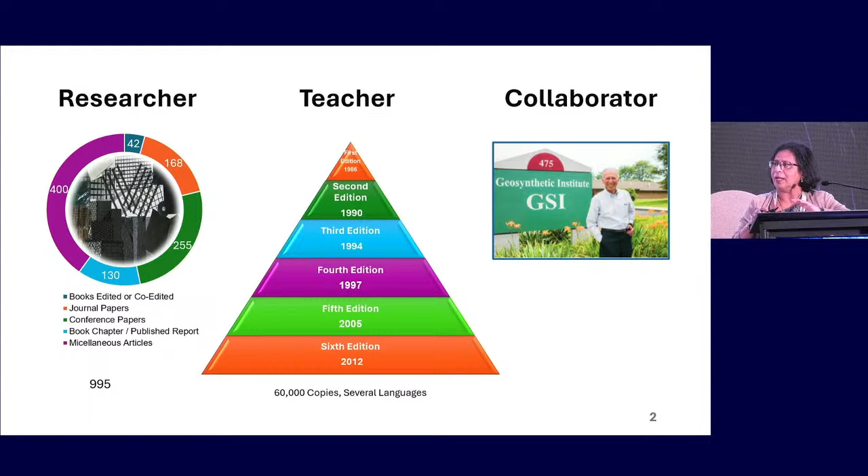So I'm going to use these three strengths, as a researcher and as a teacher, and talk to you about my journey as a faculty member at Syracuse University.

My research in geosynthetics started when I took a short course with Dr. Koerner in 1988, at one of the ASCE meetings. I just got tenure at that time, and I was looking for new areas of research. I just established an image processing lab, and I was working on soil filters. So I go to the short course. I had never heard about geosynthetics, and it was a half-a-day course.

One smart thing I did was bring a sample of geotextile with me, because he said that this can be used as a filter, and I was working on soil as a filter. I said that would be very interesting. And this is the starting of my journey and my students' journey in geosynthetics.

After that, in many conferences, I met with Dr. Koerner for a short time, but even in a few minutes, you know that he is really listening to you. And when he asks how you are doing, he meant it. And he would say that you come to GSI, use the equipment. He wrote a letter of support for one of my first NSF grants. So when he asked something, he truly cared, and I really appreciated that.

And in 2004, Dr. Koerner came to Syracuse University and gave a local ASCE lecture. He's there in the first picture with my student in my lab where I was doing work in soil filtration.

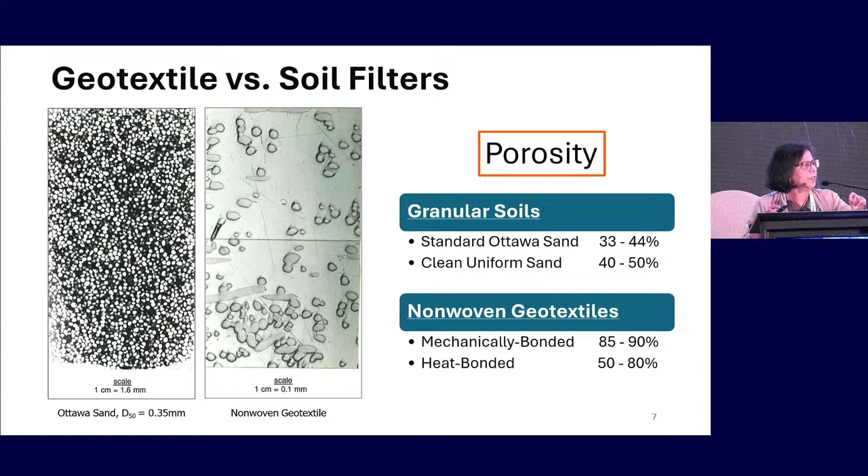So then you wonder, how would this thin, open textile work as a filter? We have done work in our lab, so we learned that geotextile alone doesn't work as a filter. It has to establish a filter zone and bridging zone. Once that is established, then it works effectively as a filter.

And geotextile filter design criteria are very similar to soil filter: permeability, retention, except clogging is more of a concern for geotextile filter, although soil filters do clog.

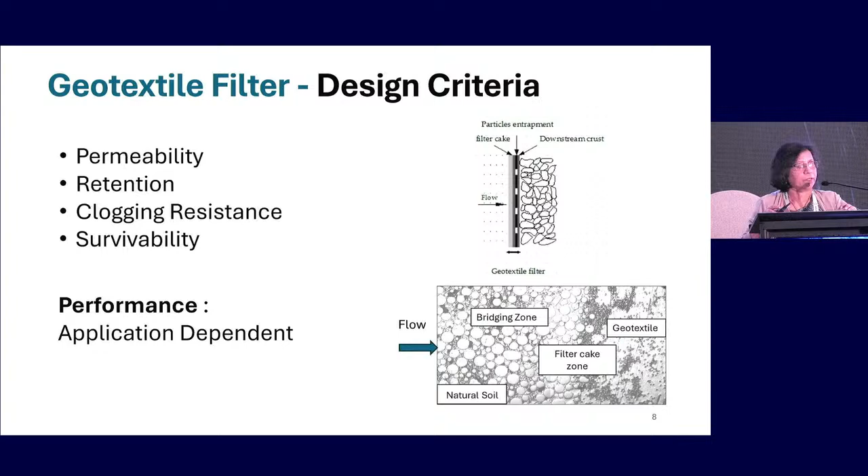Now, over 30 or 40 years, there may be 60 or 70 different retention criteria which have been proposed by lots of researchers, and they include flow of water, whether it's steady state or non-steady state. It includes soil properties, and most importantly, it includes pore size distribution or pore size of geotextile, which is different.

So now we have to really know how to measure pore size or pore size distribution of these geotextiles. So I'm going to take you for 10 or 15 minutes talking about pore size of geotextiles.

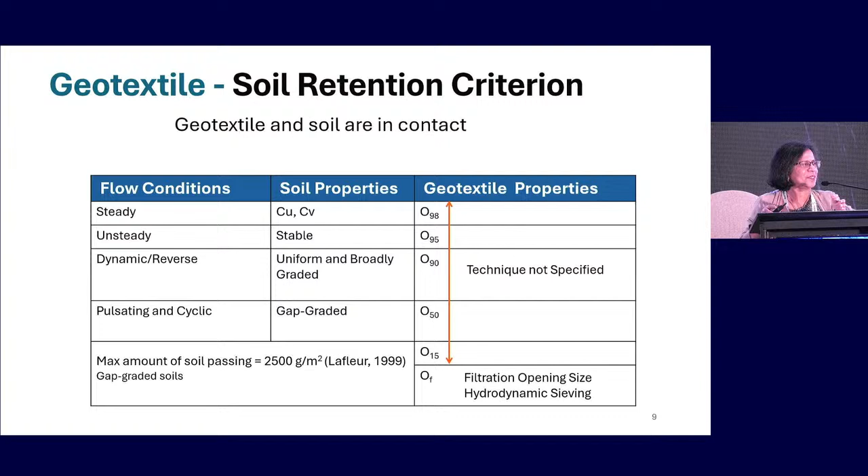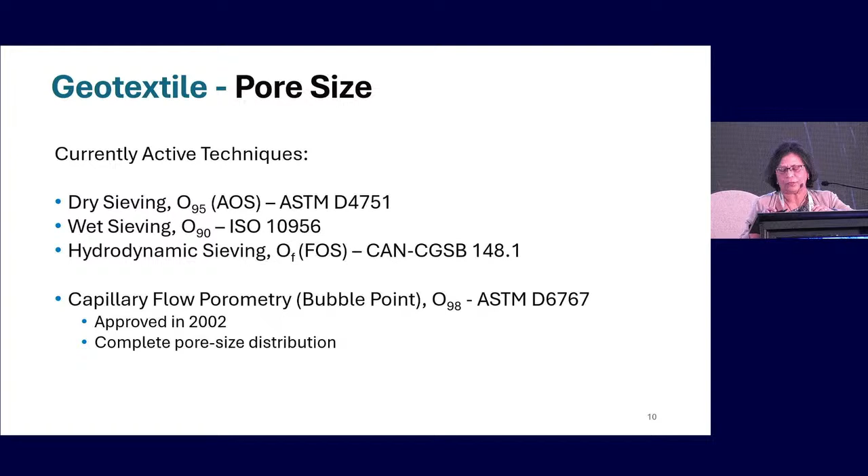There are many standards. The first three I list here: dry sieving, wet sieving, and hydrodynamic sieving. These are three standards used in the US, Canada, and Europe. They are sieving techniques. And a more recent technique is called capillary flow porometry, which can also measure the large pore opening of geotextile. Let me talk to you a little bit about these techniques.

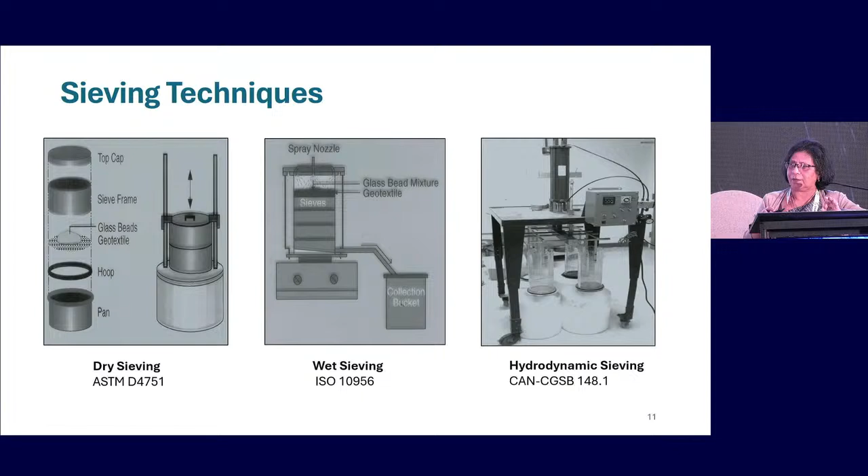These are three sieving techniques. None of them are perfect. Each of them has limitations and some advantages. But one thing I want you to remember is that each of them can give you a different pore opening size, okay? So they are not exactly the same, even if you do the test perfectly.

They specialize in measuring pore spaces of materials. So I took geotextile there. I went with my students, and they had this capillary flow porometer. I learned that most of the samples they are using have pore openings of 2 micron, 1 micron. For them, 5 micron was very, very large opening. So here I go with geotextile, which has 200 micron opening, and they said, why do you need to measure anything out of that?

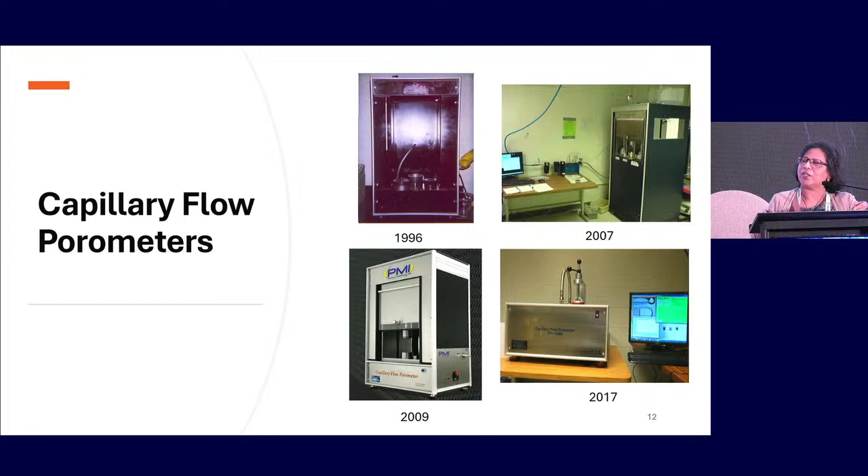So I learned a lot, and over the time, from 1996 to 2017, my students and I have gone to Cornell on numerous occasions, learned different devices, they changed different sensors, and we have used the generations of the capillary flow porometer device. This is a device, tabletop device.

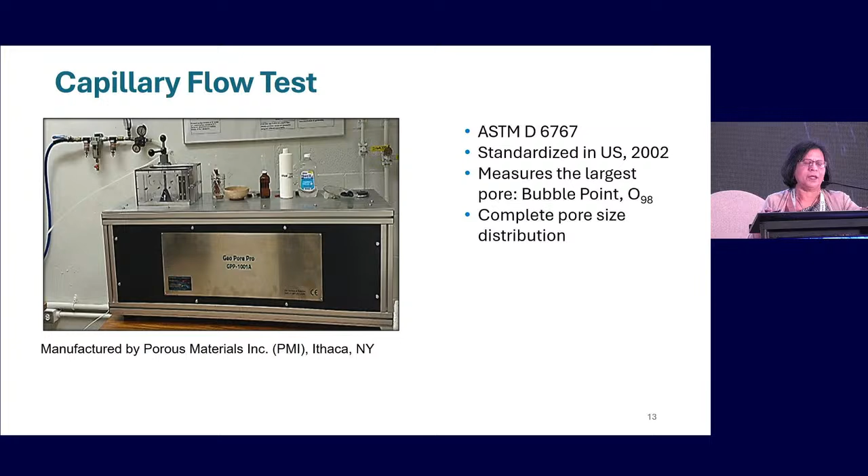It looks very simple. The test is also done in a short period of time, but it is also very sensitive. I'm going to show you some results. The latest version of the device, which I have in the lab: you take a small piece of geotextile, you saturate it with a liquid, and then you allow a pressure gradient to establish across it, and you literally see a bubble coming out of the largest opening. You measure the open pore size, not only large pore size, but pore size opening distribution.

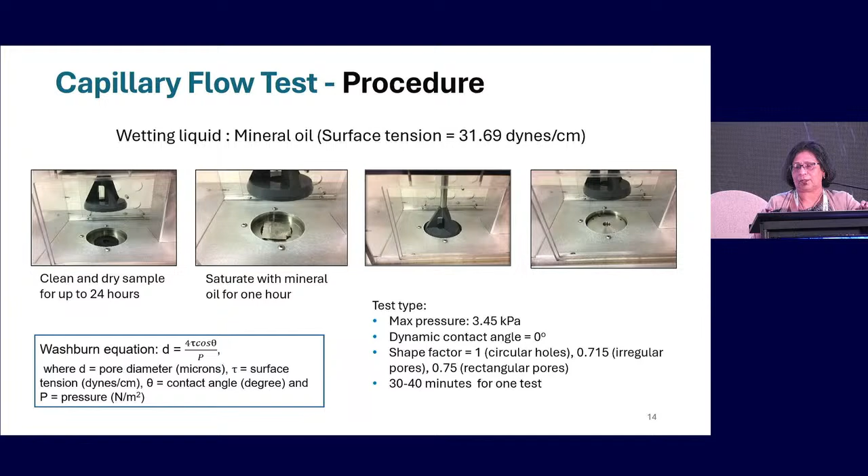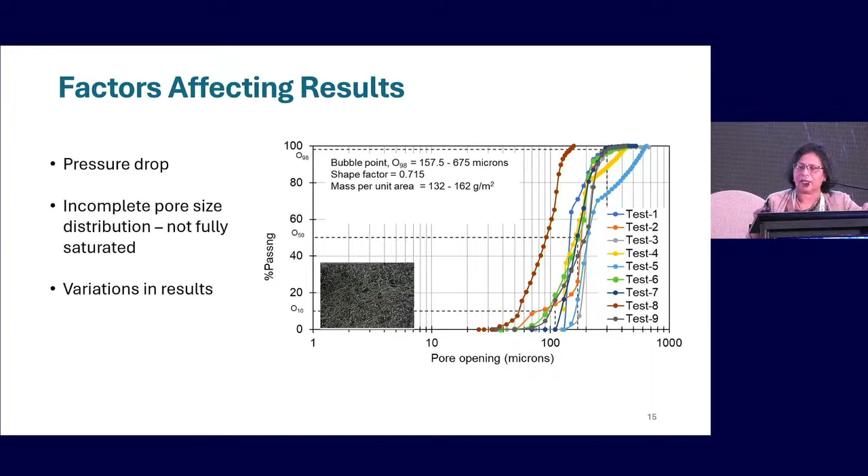Here are typical test results from one nonwoven geotextile, and you can test 8 or 10 samples in a day, so I think that's wonderful. But there can be problems where the sample is not fully saturated, there's a little drop in the pressure, and so on. So one has to be still careful about what you get out of this test.

It seems like I have done significant work, sometimes I wonder why, on pore size distribution of geotextile. The study started in 1996, and then 2007, 2009, 2017. I'm not going to show you all these results, okay? So I'm going to show you one set of results from a study of 1996, and then one set of results from 2017.

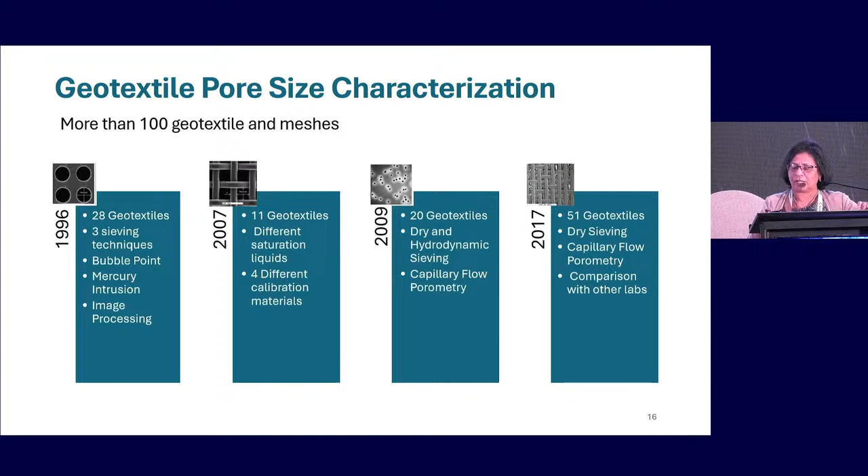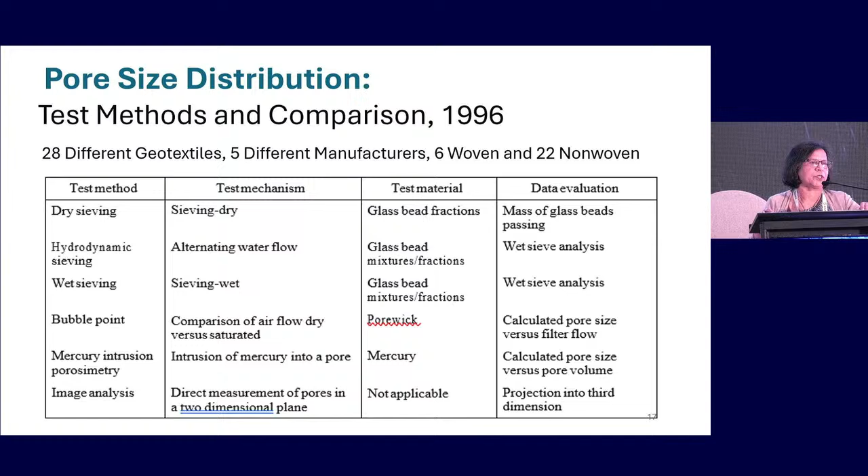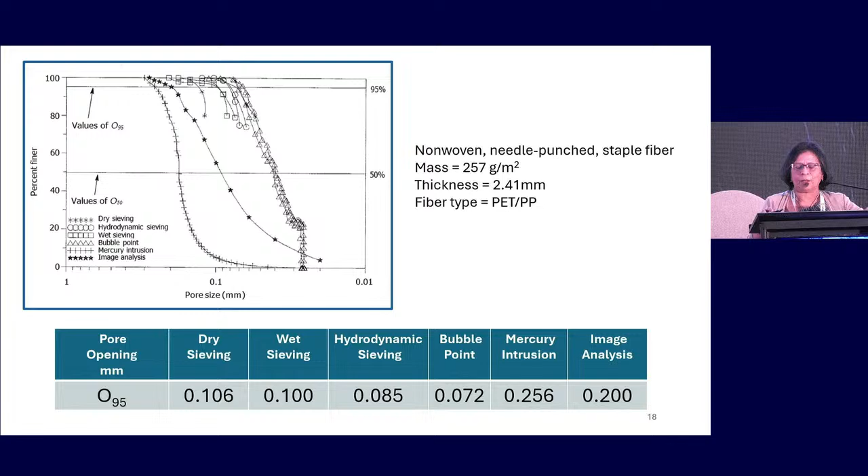When we started the work in 1996, we used 6 different techniques to measure pore size distribution of 28 different geotextiles. Let me show you the result of one geotextile. These techniques were sieving techniques, all 3 sieving techniques, bubble point technique, mercury intrusion, and image processing. What I note here, I'd like you to note, is I'm giving you only the largest pore opening, which is O95 of a geotextile. As you can see from this figure, they are very different from different test techniques, particularly from mercury intrusion and image processing. After this study, we haven't done the work on mercury and image processing, but we continue to do the work in other areas.

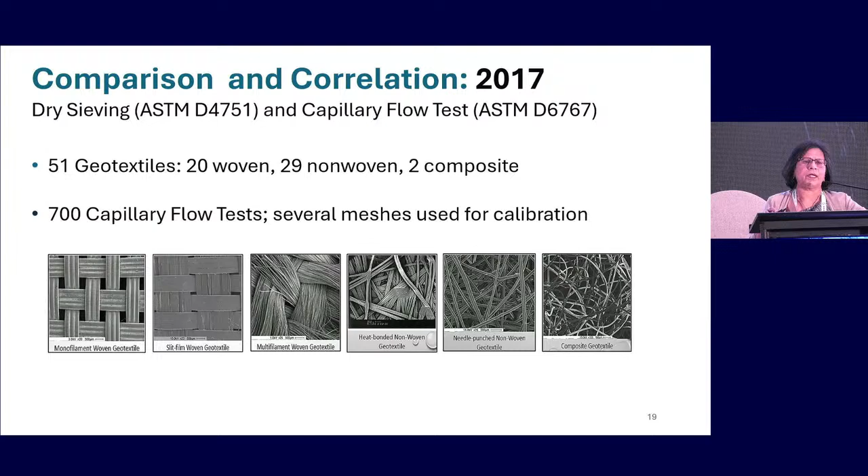Now, the question comes, why is this important? Why should we even worry about this kind of data? If we are going to move to a newer technique, which is not new anymore, the bubble point test, and we measure the pore opening, we need to remember that most of the retention criteria which are available are based on dry sieving test results. So if we are measuring O95 or O98 from bubble point, to use those relationships we need to know how much there really is from dry sieving. So this data gives you some idea, and I think this is important to keep in mind.

Now, this is where judgment time comes. This is a very interesting case history. Several years ago, I received a phone call. I think one of my former students worked at that particular company, and this was in Utah somewhere. A company was involved in building a tunnel liner, and the contractor placed a non-woven geotextile as a temporary liner. So when the project started, they found a lot of fines were coming through the textile, so they stopped the project.

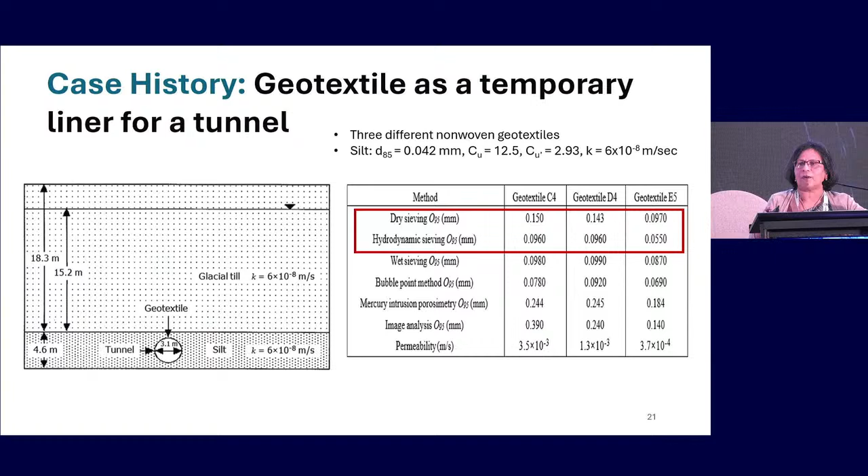Next step, we picked up some retention criteria. The four which I show you here are Dr. Giroud's criteria, Carroll's criteria, Barry Christopher and Holtz's criteria, and also our own criteria.

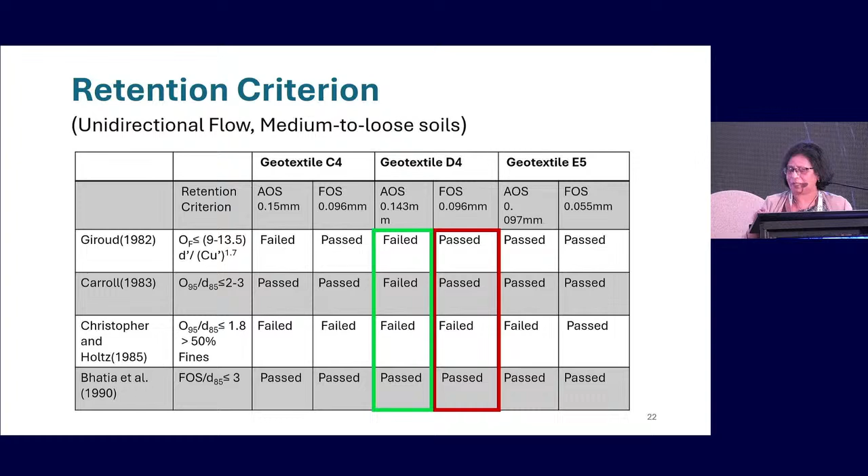If we use these geotextile's dry sieving results or hydrodynamic sieving results, look at this green box. It shows three of the criteria say the geotextile selected, like D4, failed, meaning it should not be used. But if you use the FOS of the same geotextile, a different number, then three out of four criteria say it should pass. If we stop here, I don't know what the answer is, because it depends which value you use. So we go a step further.

As geotechnical engineers, we all love FlowNet. Students don't, but we love FlowNet. So we drew a FlowNet and calculated the hydraulic gradient at which water would be flowing. Then we conducted a long-term filtration test. The company sent us silt, so we put it in our filtration test next to each geotextile at around 45% water content, and performed the test for 24 hours at a hydraulic gradient of 4 or 5.

It seems like all three geotextiles worked very well, so we increased the hydraulic gradient to 10. You can see for one of the geotextiles there's suddenly a jump, and a lot of fines came out, meaning the filter cake that was formed was not stable. Based on that result, we recommended either of the two remaining geotextiles be used. We never heard back from the company, but we received a thank you note and a check, so I think the project was successful.

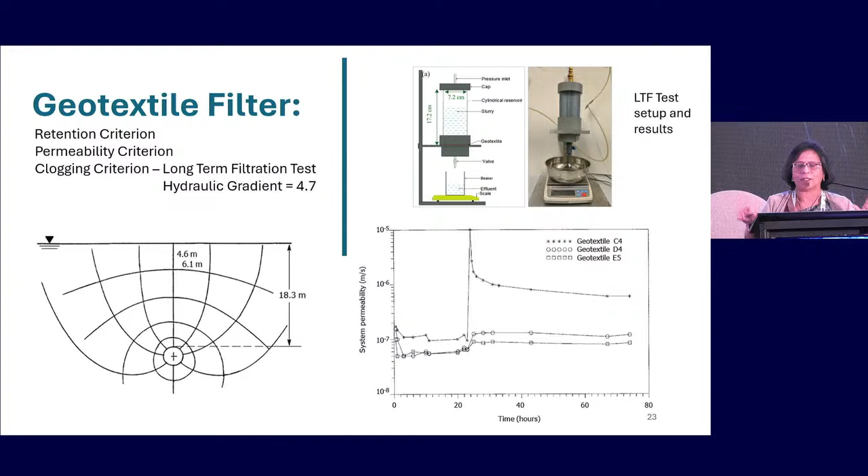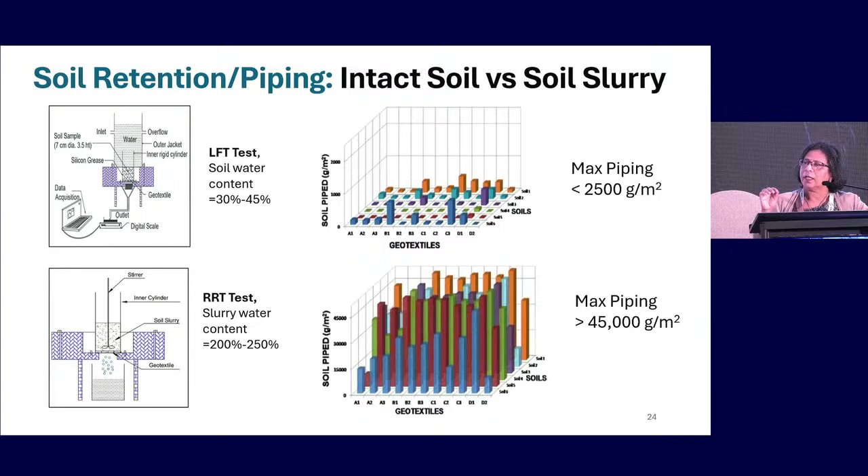What I want you to notice is that the amount of soil piping through 11 geotextiles with 7 different soils is significantly higher—a lot of soil came out of that. In many applications, we don't want that to be happening. So water content of the soil, which was not really part of many retention criteria, plays a very important role.

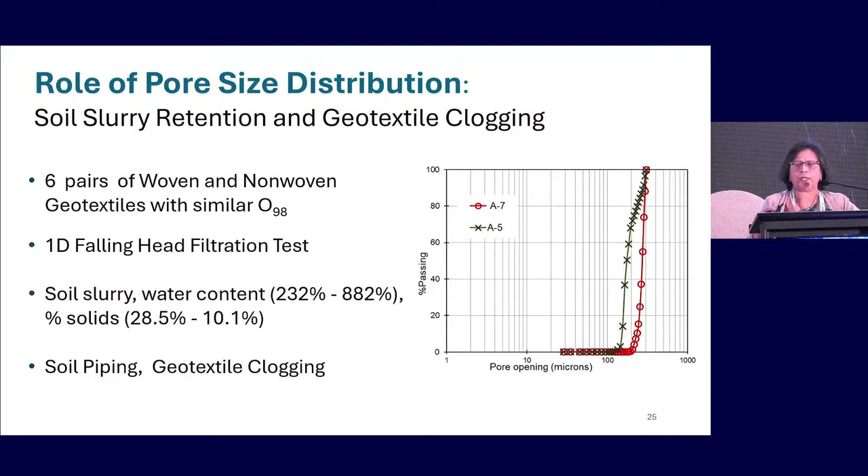We conducted a more recent study where we changed the water content from 230 to almost 900%, and found again that water content plays an important role. In each of these cases, the geotextile's largest pore opening was the same. We did find that O98 played an important role, but the key message is water content becomes a very critical factor when looking at soil piping.

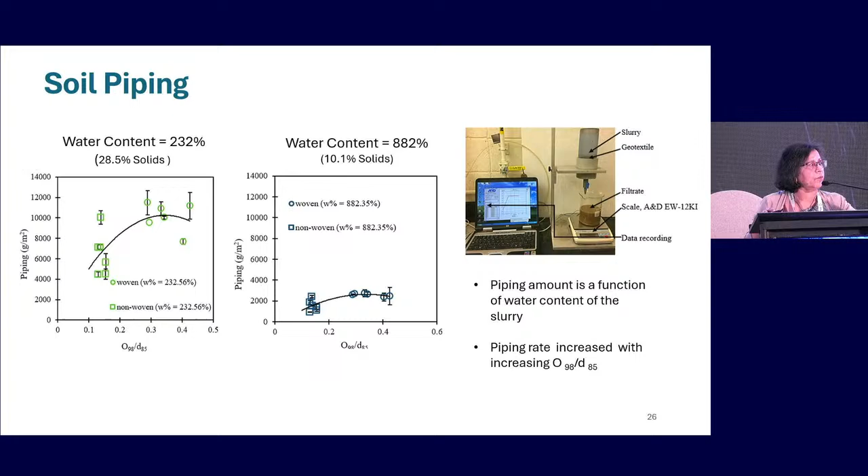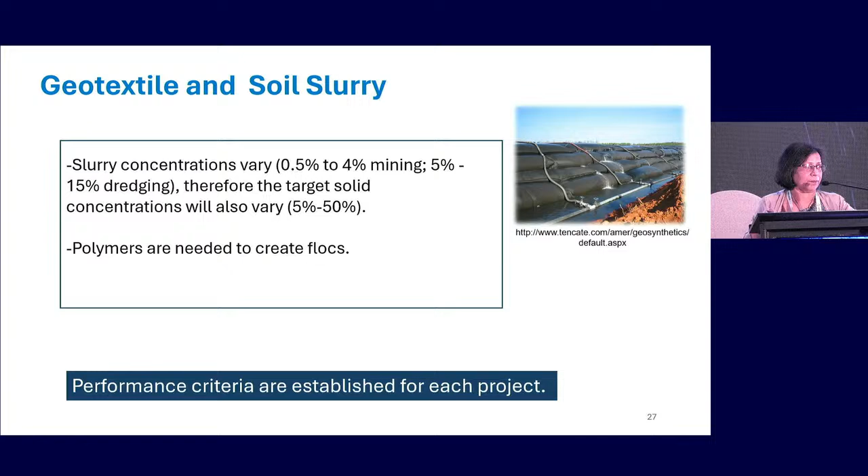If we take the soil, many of these soils are dredged soil and fly ash—they have very fine particles, and most of our geotextiles have large openings. These fine particles would easily come out, particularly if the water content is very high. So we modify these soil particles by flocculating them, making them into bigger flocs. I'm going to talk a bit about that direction.

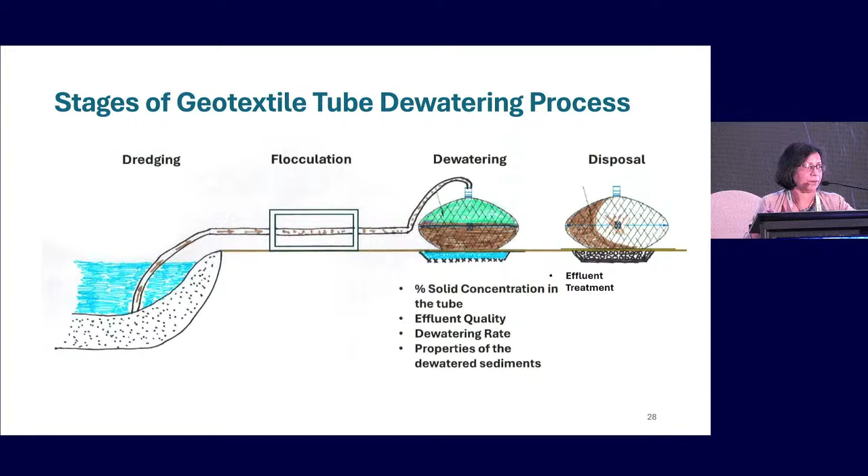This is my hand-drawn sketch of a geotextile tube. They're dredged—I'm not going to talk about dredging. Sediments are flocculated—I'm going to talk about flocculation. Then they are dewatered, meaning the geotextile tube works as a filter, retaining the soil particles and allowing the liquid to come out. Once most of the liquid comes out, which is probably water, then we worry about what we're going to do with the remaining sediment in the tube.

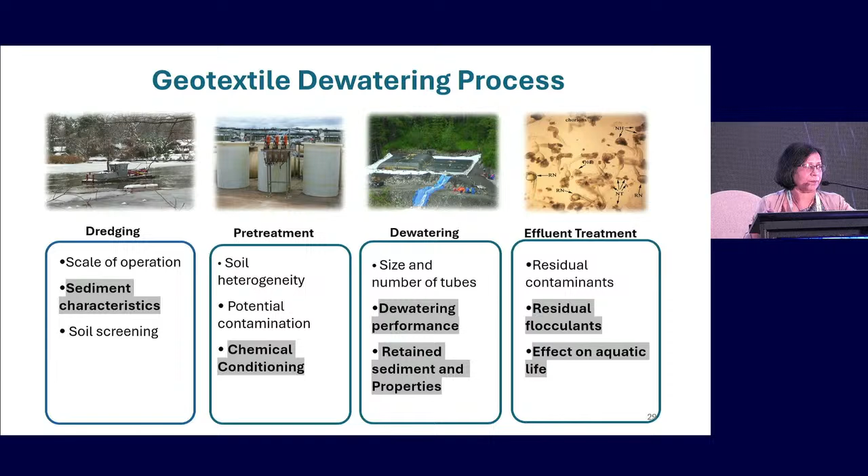These processes fall into four groups: dredging, which also involves deciding whether to remove coarse particles before they go into the tube; pre-treatment, which is chemical conditioning; dewatering, meaning the size of the tube, the type of geotextile, and how much particles will be retained; and residual flocculant and treatment. I'm going to talk about our work in each of these categories.

Around 10 years ago, there was a wonderful graduate student with a chemistry background, and we were working with a company called WaterSolve in Michigan. They had been dredging sediments from many lakes and were willing to send us 20 different types of sediments from lakes, rivers, and ponds all over Canada and the US. We were very excited. These buckets came, 60 to 70 buckets delivered. Some of them smelled terribly, so we didn't open them during the daytime. We opened them on weekends and did the work at night.

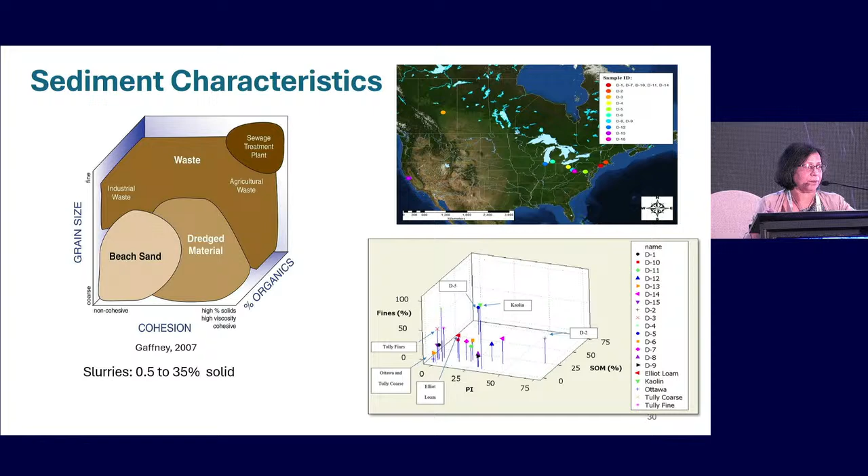These sediments were of many different types, and we thought we could find a relationship between physical and chemical properties of these sediments and the particles retained in the geotextile tube. This student, who had a very good background, did a lot of physical geotechnical testing in addition to a lot of chemical tests. But we found that each sediment is so unique - there's no uniform relationship. The physical properties of the soil particles play some role, a little role, but every sediment was different. So we learned a lesson. We are still writing this paper because we don't know how to really calibrate and come up with all of these properties.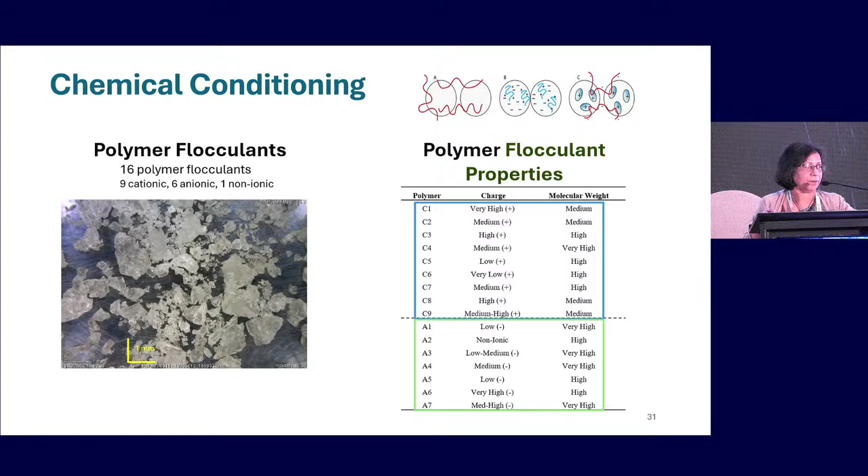Now, chemical conditioning and flocculants - as I mentioned, when there are small particles, generally polymers are added in the tube. I'm going to talk a little bit about our work in this particular area. We conducted two studies. One, we used polyacrylamide, cationic and anionic. You can see them - there were 9 cationic polymers and 6 anionic polymers, all higher molecular weight.

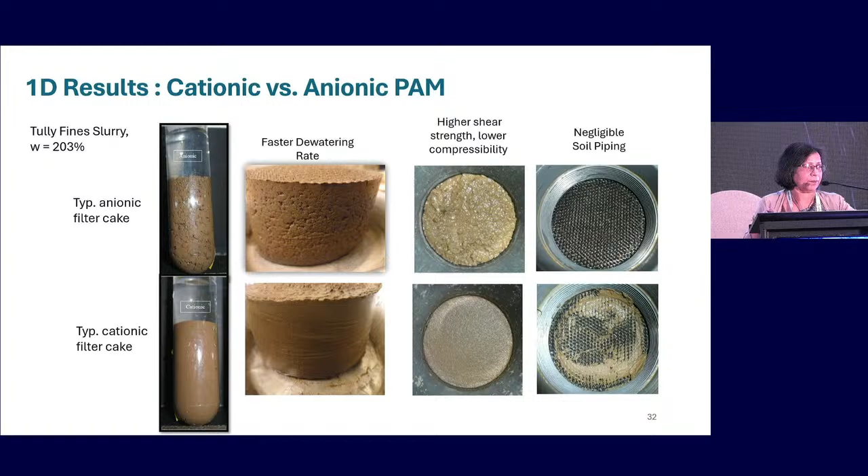On the top is an anionic filter cake, on the bottom we see a cationic filter cake. Both have a very high molecular weight. What I want you to notice is that they are very different, particularly the flocks formed in anionic polymer - they are much larger flocks, look like a cheese curd kind of thing. If you look at the extreme right, the geotextile you see is completely clean; all the particles are flocked together more like a lump. The flow rate is also different. Cationic, which is also bridging the particles together, makes more silt-sized flocks, and from that you see the filter cake is very different, so the flow rate is very different.

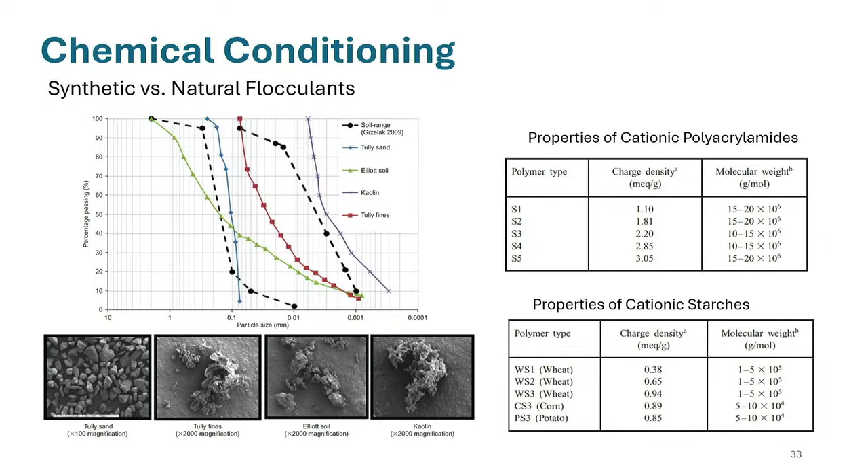We selected 4 different types of soils and performed the test. Let me show you some results. We find that polyacrylamide, particularly for these 4 soils, made larger flocks generally, whereas starch flocks were very small. On the left-hand side you see a result. The curve at the extreme right is without any polymer - you see by adding any polymer, whether polyacrylamide or starch, the time of flow or removal of water decreased dramatically. But what's important to note, if we look at the table, is that without any flocculant, the amount of soil passing was around 6,000 grams per meter square. By adding polyacrylamide, that reduced to a negligible amount. But using starch, you still have around 400 grams per meter square, which is not much. So I think both of these polymers worked well.

But what we found is that the water content or solid content of the filter cake, which is very important, was much higher with starch compared to polyacrylamide. So starch did work as an effective polymer, and it drained more water out. Since then, in many applications, we have tried to use starch instead of polyacrylamide.

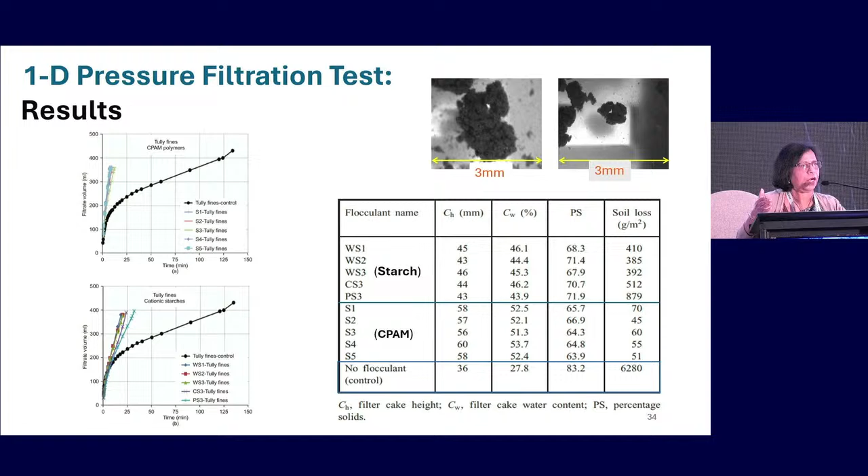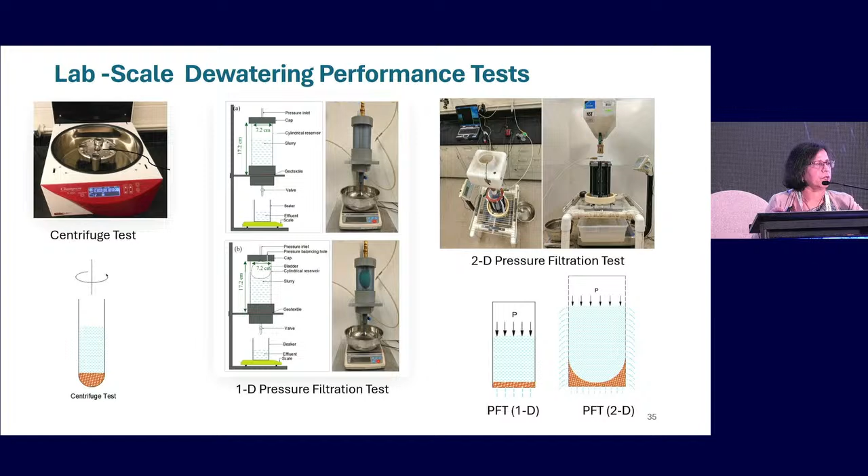So let me take you to performance testing. Over the last 20 years, we have tried some existing tests, such as centrifuge, which is not really a typical geotechnical test, but we find it to be very effective to calculate solid content. We have developed 1D, 2D, and 3D lab tests, and then we have performed some larger tests in the lab. In fact, one of the papers presented tomorrow will cover large-scale tests which we did a few years ago.

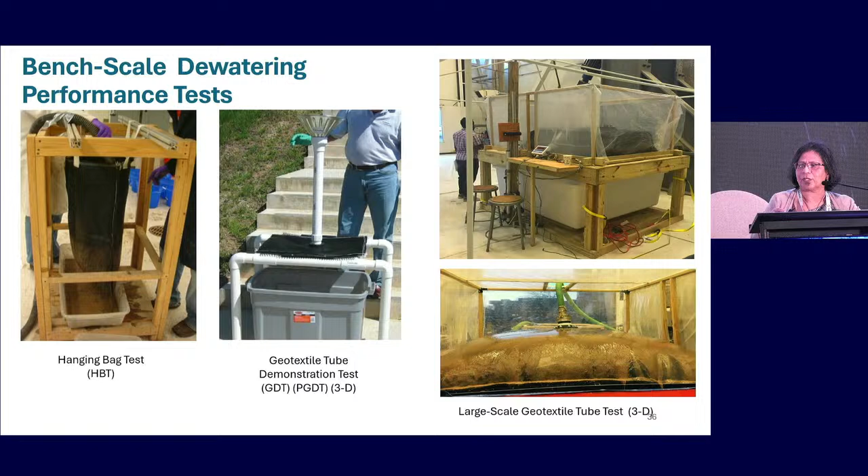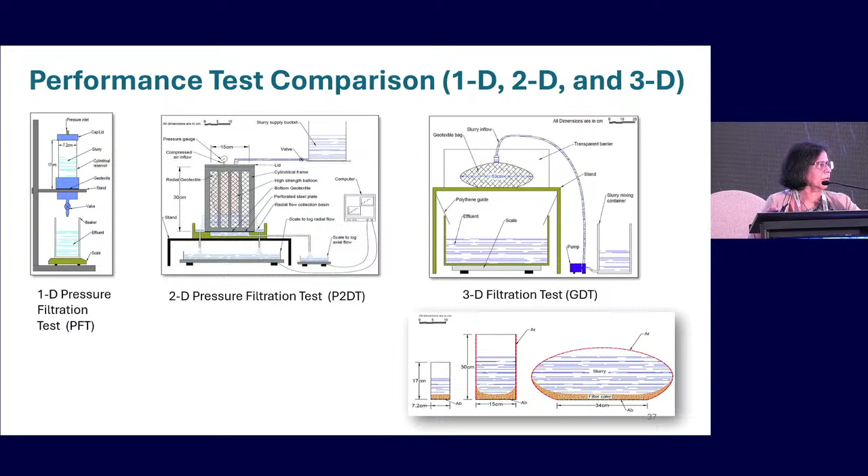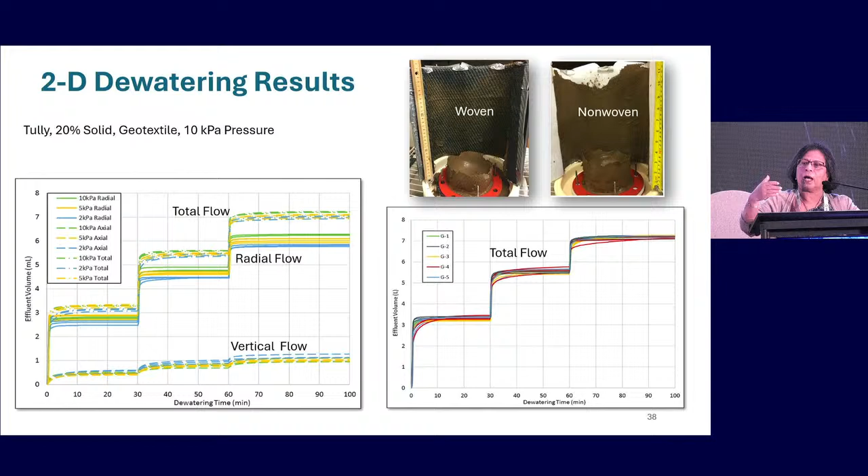Now, what do these tests tell you, and how do they compare? Of course, 1D is simpler compared to 2D and 3D, so I'm going to show you some results here. The 2D test, which we have developed, allows water to flow vertically through the geotextile and radially through the geotextile, so we can look at the direction of flow and how the filter cake forms differently.

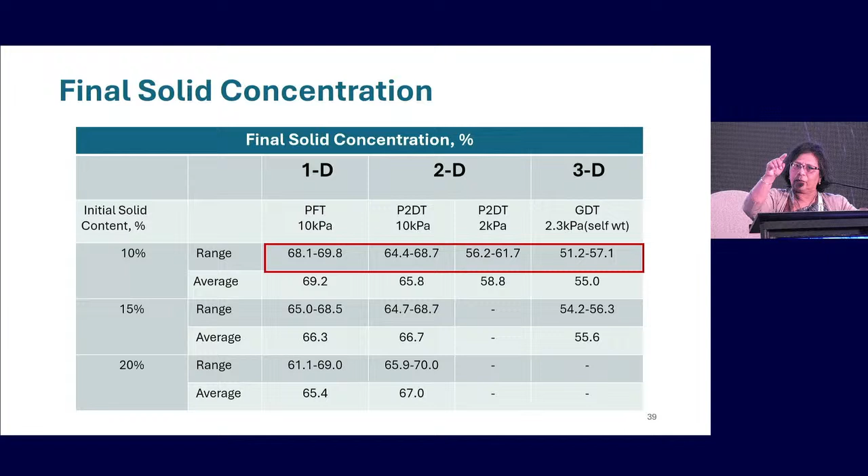Here are some test results for a given type of soil - 1D, 2D, and 3D. Many times in the field we do 3D tests, sometimes just 1D tests. The red box I show you here shows the solid content. If we compare 1D to 2D, there is some difference, but when we look at 3D, the solid content is at least 5 to 10% lower. This is not always true for every soil, but it's based on many silts and clays which we have tested in the lab.

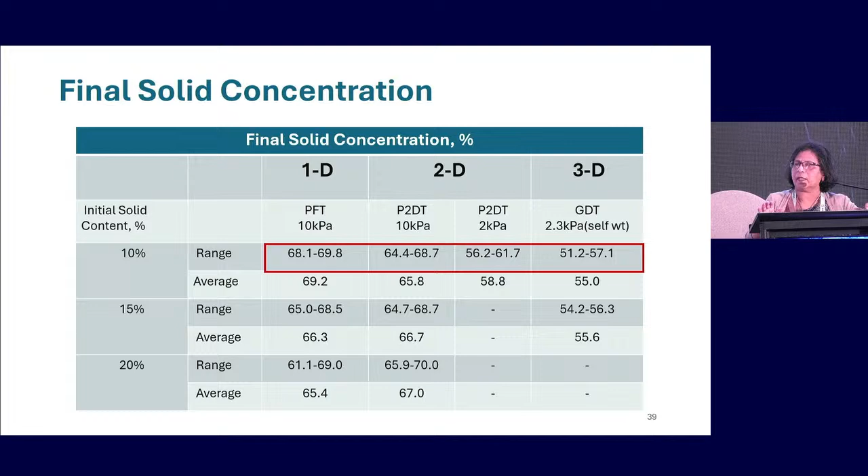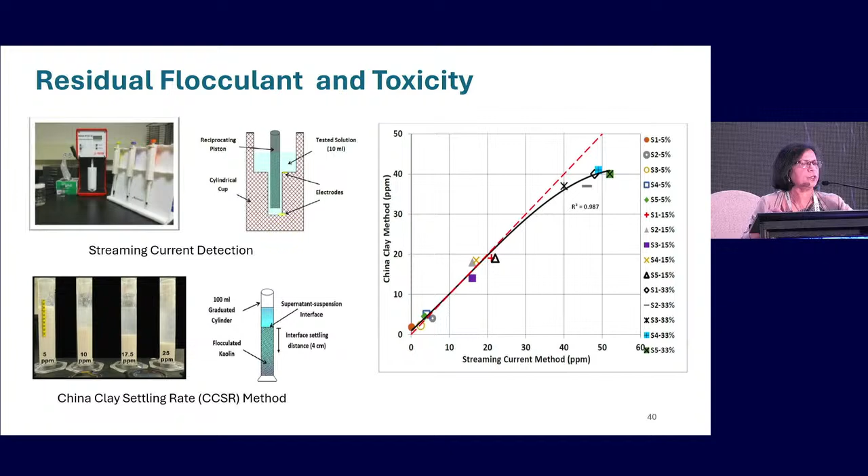Now, the liquid which comes out of the tube, sometimes polymer can come out as well. So we have developed a technique called the streaming current method to measure the amount of polymer that comes out. More recently, I collaborated with a colleague in the biology department to measure the toxicity of the polymer that can come out of the geotextile tube.

On the graph at the bottom, the blue bars, which are completely full bars, represent 30 ppm of polyacrylamide, where all the embryos died from exposure. Next to that is 30 ppm of starch, where hardly any embryo died. So 30 ppm is a very high concentration, but this is important—this was the first time we looked at the toxicity of the effluent that could come out of the geotextile tube.

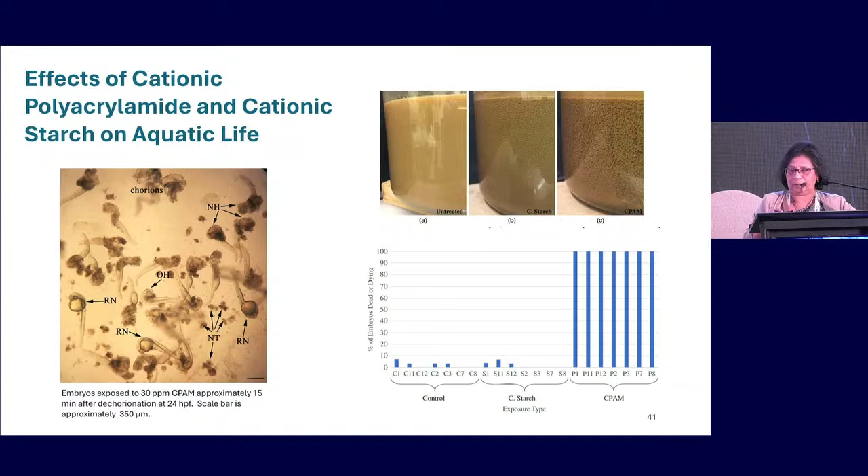We have tried adding different types of fiber, natural fiber. In fact, one of the fibers here is peanut shell, just ground together, coconut fiber, and synthetic fiber. What was the purpose? We wanted to see whether we could increase the strength of the filter cake, because in many applications we stack the tubes one over another, and the stronger the material, the better it can bear the weight of other tubes on top of it.

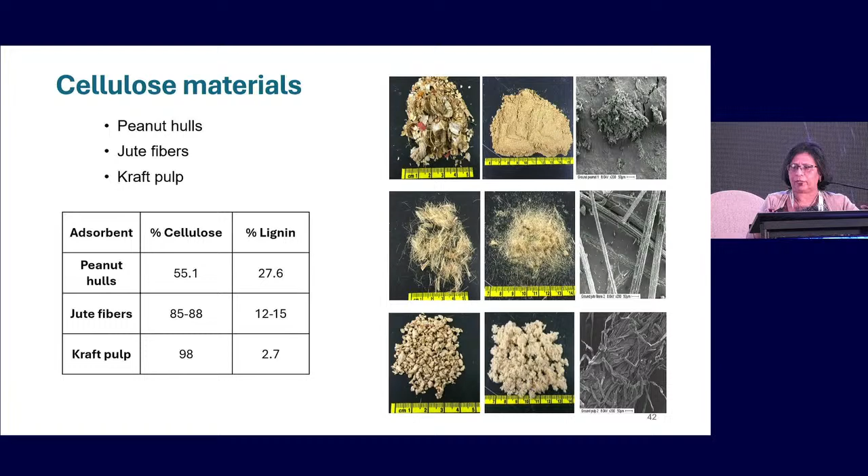So now I want to talk about three different case histories, and they are very different in terms of scale. First, on the left-hand side, is a small industrial pond owned by a company that makes glue. It's in Illinois. The material in this pond was really their waste, and they were running out of capacity in this pond and wanted to dewater it. So that is the first project.

Second, in the middle, is a scudder retention pond in a residential area in New York. Again, the lake was running out of capacity—a lot of sediment had been deposited, and they wanted to dredge that sediment from the lake.

And the third is one of the largest projects I think ever done, in Syracuse, New York. I've been living in Syracuse for 42 winters, very much part of Onondaga Lake, which is a beautiful lake, but the most contaminated lake in this country. The cleaning of this lake happened by dredging the highly contaminated sediment using geotextile tubes. So these are three case histories—different types of projects, different scales.

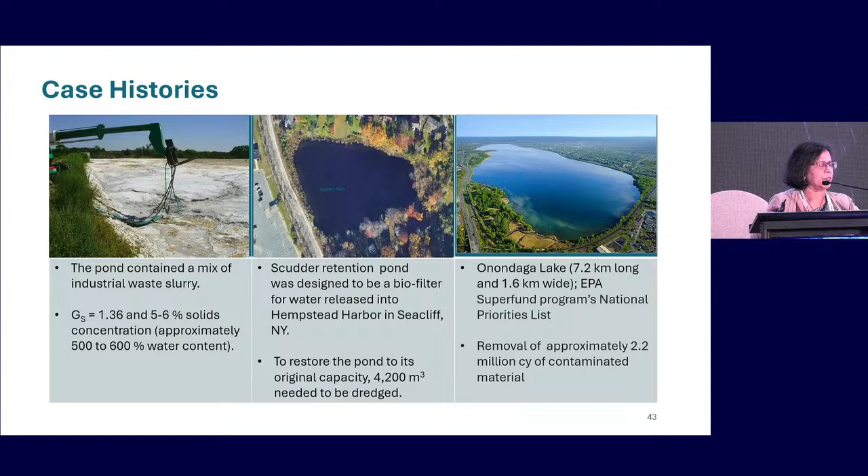So first, case history: I was working with a company, and they were bidding for this project. They performed some tests in the lab and said that when they take the sediment out of this industrial pond and dewater it, it will have 20 to 30% solid content. There was another bid which said the solid content would be 40%. So I worked with this company, and they asked if I could do some testing in the lab to give them an idea of what the solid content would be in the field—whether it's 40%, 20%, or something else.

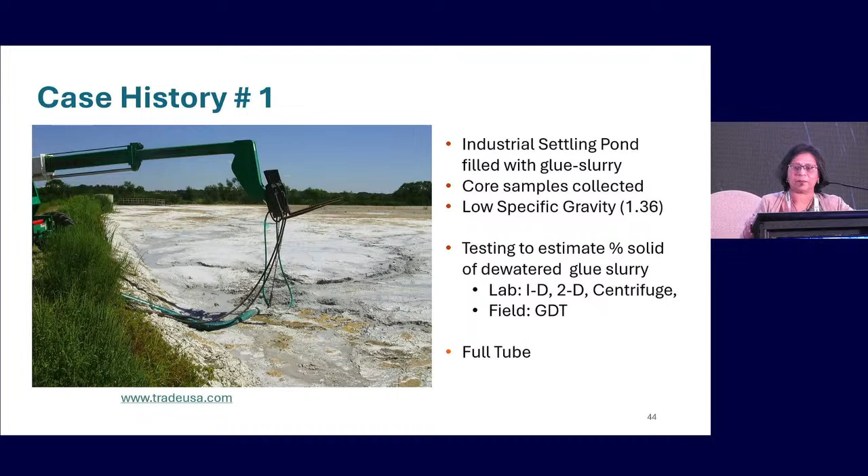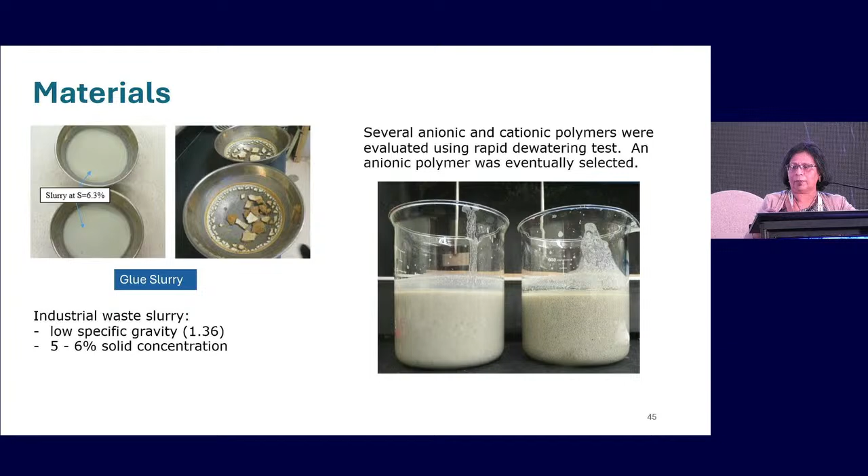So this is the project. We received the sample in the form of a slurry, and we tried to measure the geotechnical properties once dried—like a little dry biscuit, you crush it and measure it; it has no cohesion. It's not a soil, it's a gluey, pasty kind of soil. We did find some synthetic polymer which could flocculate this slurry.

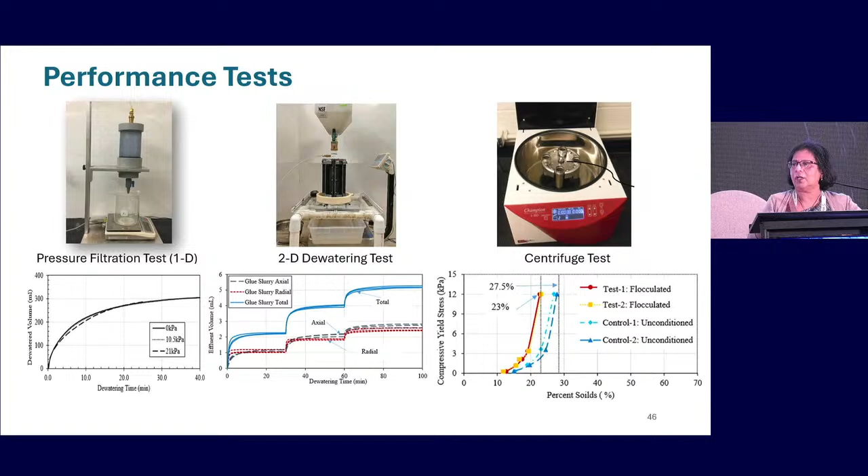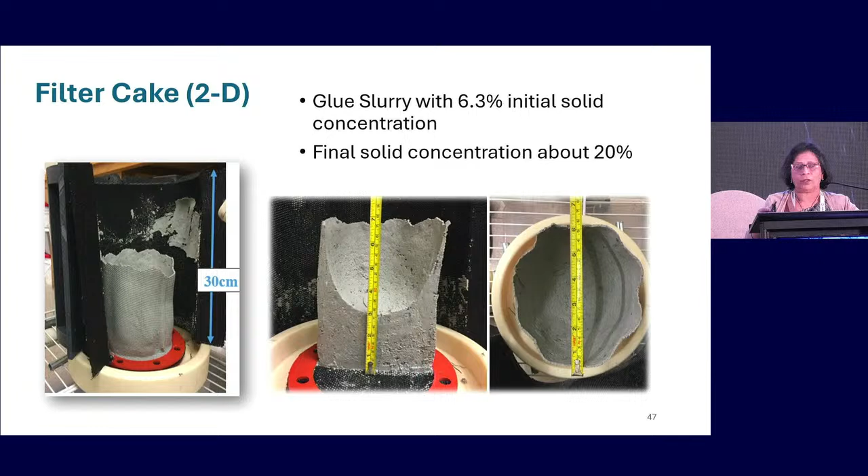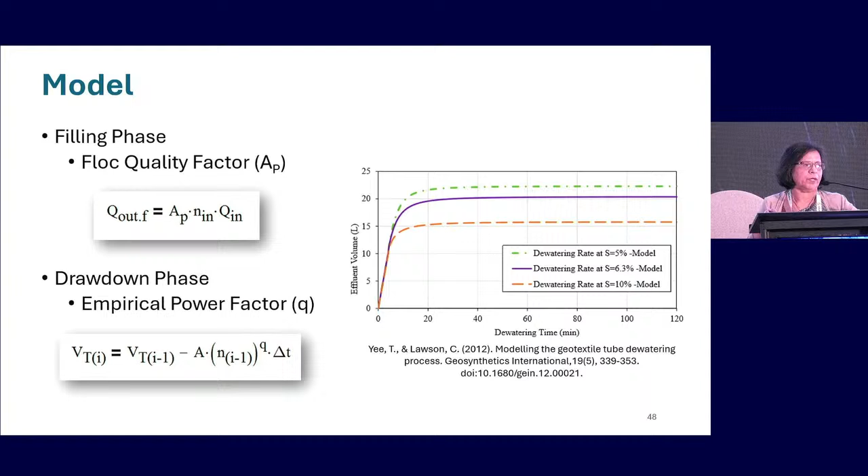Then we performed 1D tests, 2D tests, and centrifuge tests on this slurry. The 2D test was wonderful because we could see how the filter cake would form in the radial direction and the vertical direction—it looks like blotting paper, actually. We developed a model based on work done by Lawson, and we used that model as well. Let me take two minutes to talk about these test results.

So what you see on the right—or your left probably—are the average test results. I'll start with the PFT, the 1D test: it gives an average solid content of around 18%. Then the 2D test shows solid content around 22%. The 3D test is around 21.2%, and the centrifuge test, which is a small tabletop test, is around 23%. The model also gives around 23%.

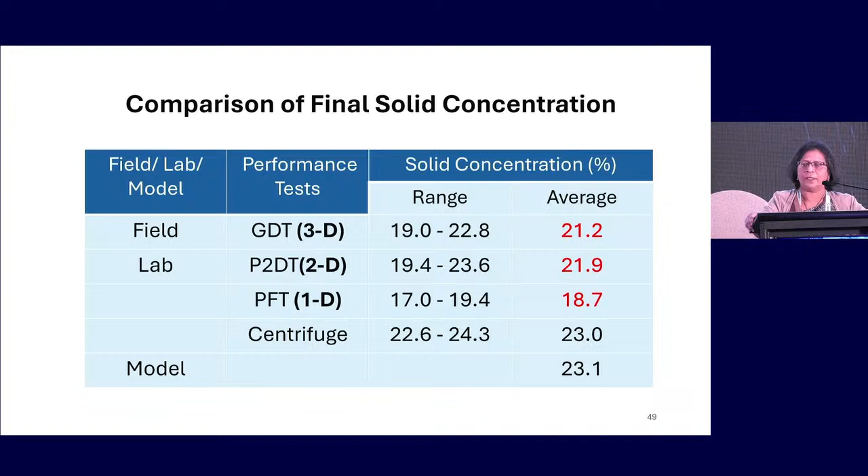From a geotechnical point of view, this data is very close. They are giving us an idea of around 20 to 22%. So based on these results, we suggested to the company that their bid for the solid content in the field should be around 22, 23 - and that's what they got for the project.

In the field, they tested a big tube, and the solid content was around this range of 23, 24%. This was a wonderful relief - it gives an idea that some of the tests we do actually work. So this is the first project where all these performance tests I talk about come into practice.

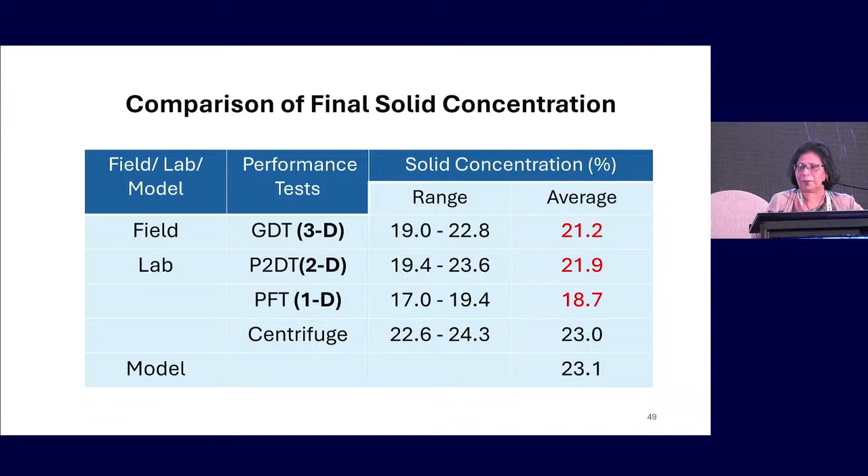So let me take you to the next project. This is not industrial, this is a residential area, and around this lake there are homes. Most of the sediments going into this particular pond are really garden soil and so on. It was tested, none of the sediments were contaminated, and it was decided to use a geotextile tube to dewater these sediments.

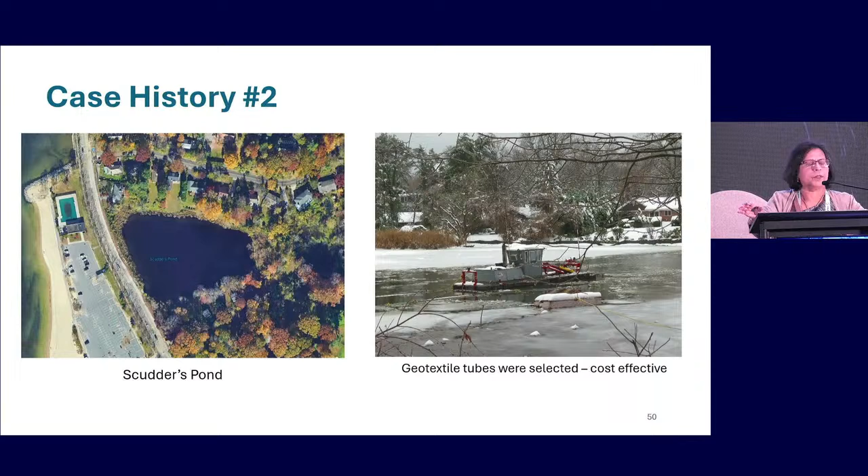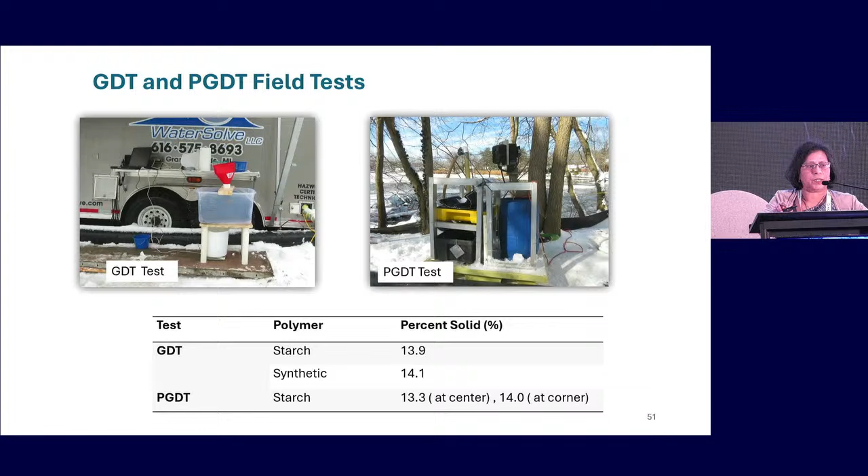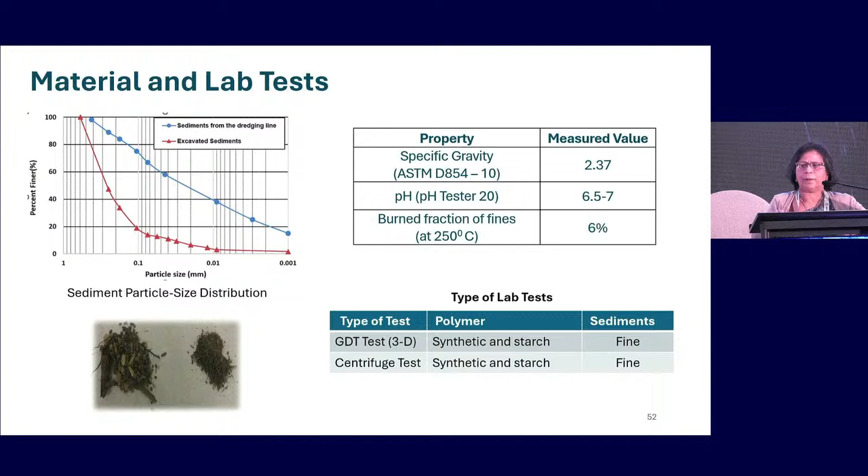So we were involved, my student and I, in this project with the company leading it. We did tests in the field where the sediments are coming in and being dredged. In this particular project, we wanted to see whether starch can work as well as polyacrylamides. We did some testing with the starch, brought samples back to the lab in buckets, and found, as expected, little dead wood, some paper, some plants and so on. So we separated them and then performed different tests.

So I skipped one - now, in the field, the testing was done, which I'm going to show you. The full tube tested in the field gave an average solid content of around 27%. Looking at the centrifuge, it's much higher, at 33%. And looking at the 3D test in the lab, it's 36%. So unlike the first case history where everything matched beautifully, this is not the case here.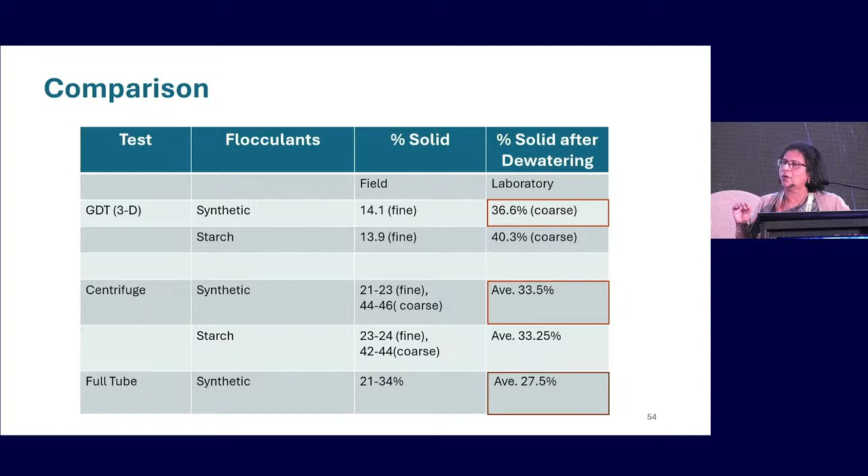One possible reason is that the samples coming from this pond - dredged sand - were highly variable. When we brought them into the lab, we separated some of the coarse particles, so it's not really truly representative of all the sediments that go inside the tube. But it still gave us an idea that starch works as well as polyacrylamide, and that what we predict in the lab can sometimes be much higher.

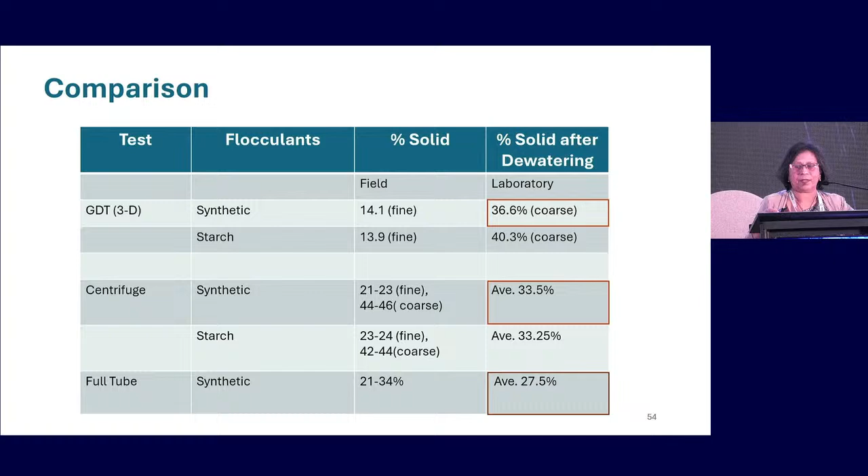In fact, the residents of that area were asked to take the sediment and use it in their garden. So it was a wonderful, successful project from a dewatering point of view.

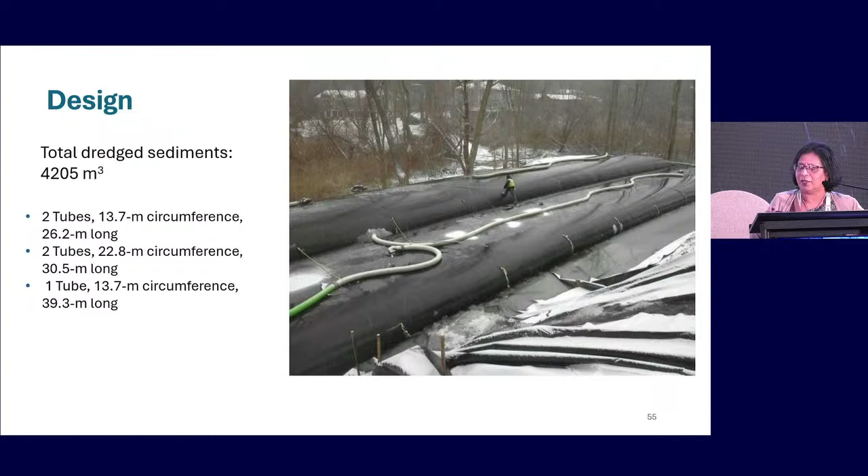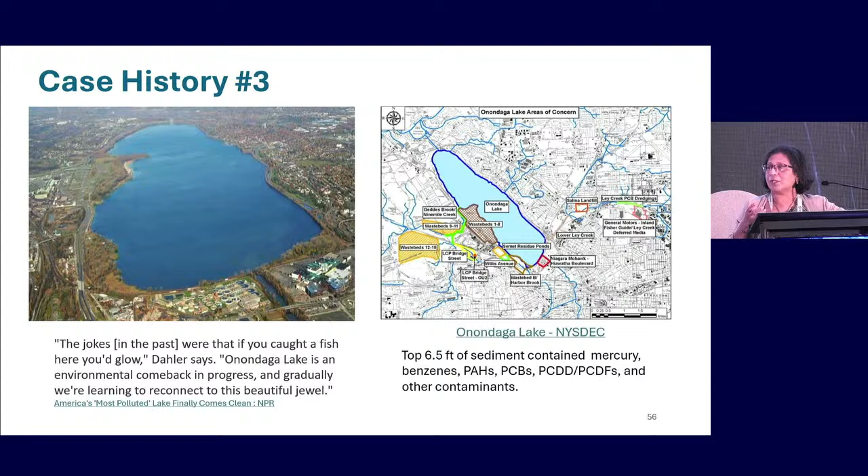Now, the third case history is more of - I was a consultant, but there are companies here, Tencate and so on, who were involved in this project. When I moved to Syracuse, my husband and I moved to Syracuse, this was a joke: if you catch a fish from the lake, you will glow because it is so contaminated. For 100 years or so, a lot of contaminants from industry have gone into this lake.

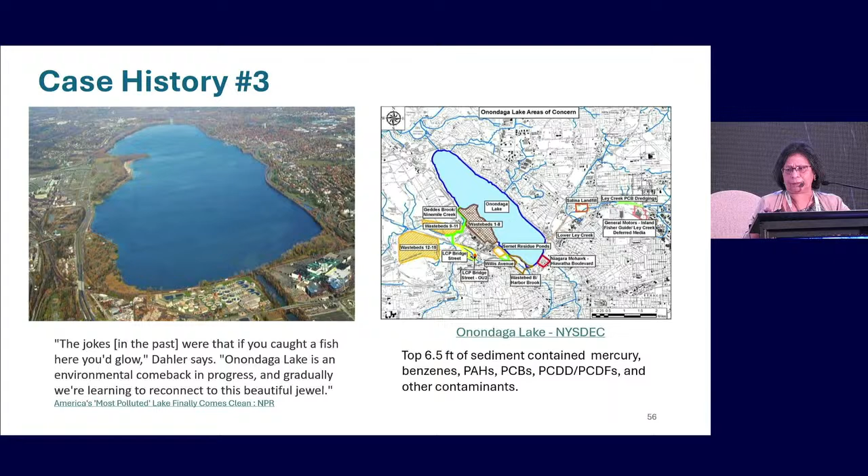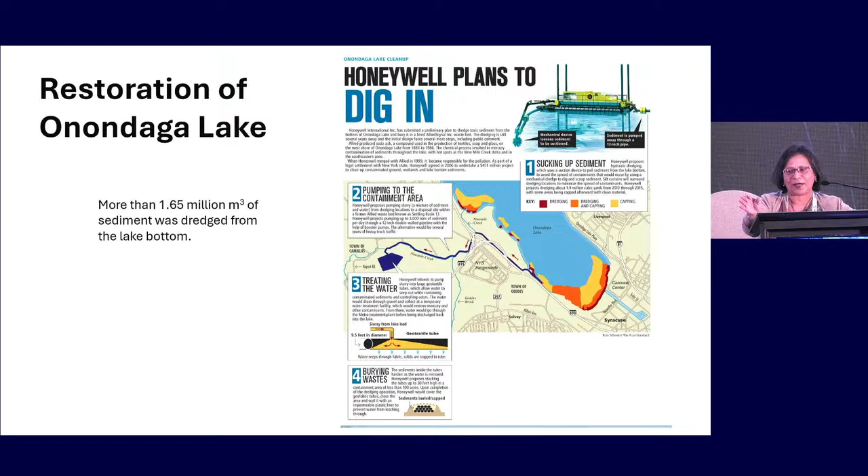Now, when people ask what I do, I say, you know Onondaga Lake, all the contaminated sediment, the tubes they use - I work in that area. So it has become much easier to explain why it's done and why I do that. I really appreciate that project.

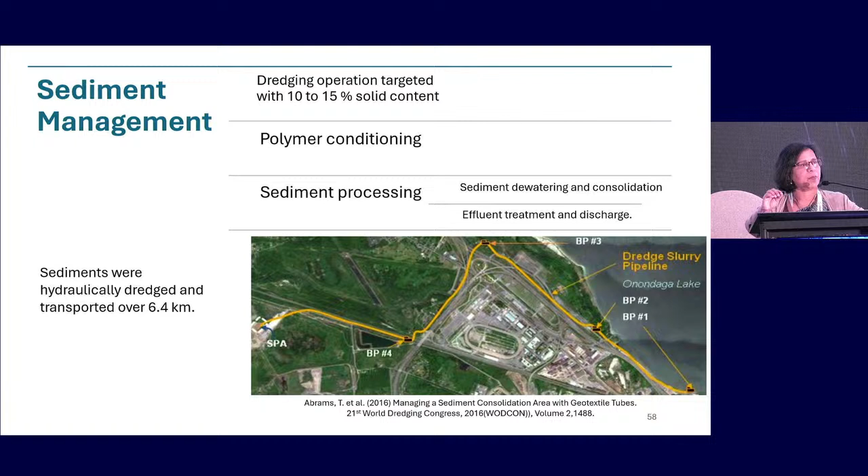The lake was one of the largest dredging projects in the country at that time. All the steps I explained in my presentation - dredging, sorting, polymer selection or decision, addition, dewatering, and finally what happens to these tubes and what comes out - every step is the same as in a small project, except here the tubes are different. There are almost 900 - I think 94 tubes.

There are 5 layers. All these contaminated sediments are permanently landfilled in this particular area, and this project was completed in 2017. If you go to this area, we're still not allowed in, but it's all vegetated and looks beautiful.

So I think this is a story about geotextile tubes as a filter, but with all these new trends, which are polymers, and what comes out of polymer toxicity, had made this work really exciting and challenging.

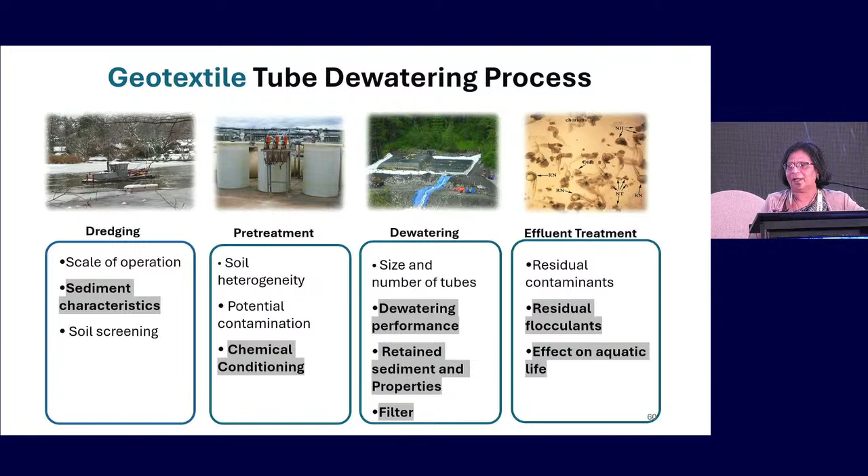So I have just 5 minutes. I'm going to talk to you about a very quick journey on teaching. I've been teaching at Syracuse University, which is a private university known for its snow and its sports. I'm from a small department of around 280 undergraduates, and some of them are here.

I taught my first course on designing geosynthetics in 1990, after I started working in this area. Since then, I have taught this course 30 times. It takes both graduate and undergraduate students.

I introduced geosynthetics and all the wonderful samples we get from manufacturers, for K to 12. I built models, my students and I, and demonstrations. They love it when you add polymer to the slurry and flocs form - that's a very likable project. I introduced geosynthetics as a manufactured material, as suggested by my friend Angel Palomino, not man-made material, but manufactured material.

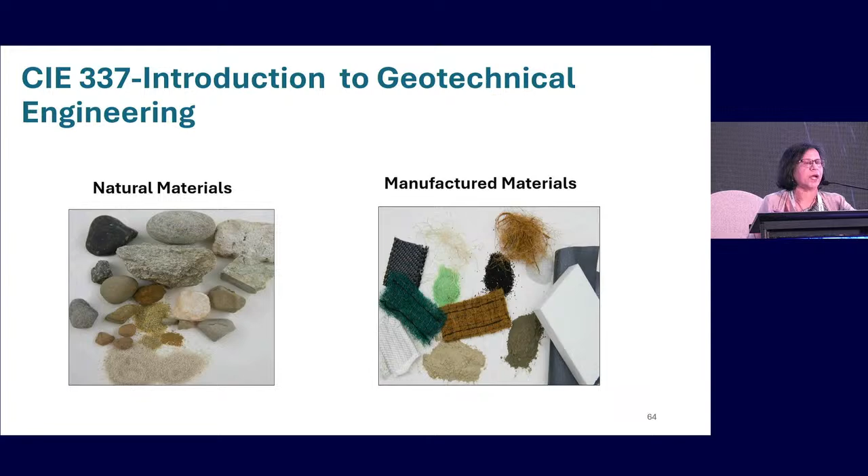We introduce them right when I teach geotechnical engineering. And I think students need to see this product or material in different varieties right from the freshman class.

And then the geosynthetics class, which I've been teaching, is all project-based. I've been benefited by many manufacturers who have come to the class, offered training and given software.

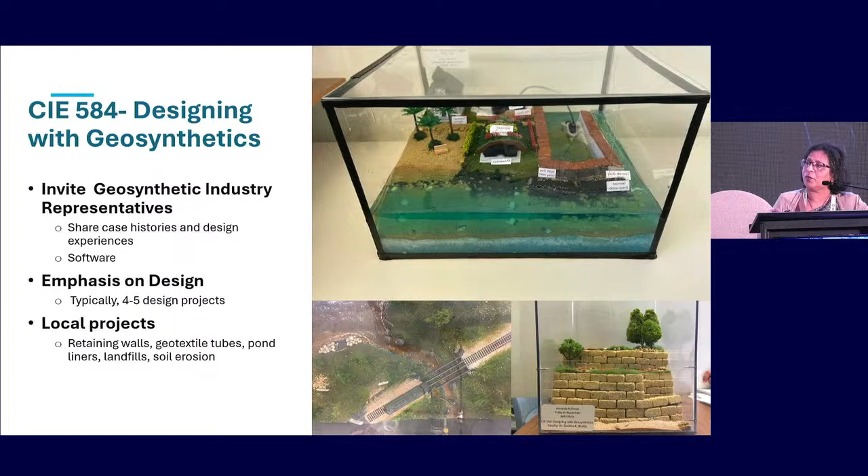One thing I am particularly pleased about is that I encourage students to build 3D models. I am surprised - they are sometimes resistant at first, but I'm surprised at how beautiful the 3D models are over time that they build. And they work beautifully for K-12 education. Here are some of them.

Now my third strand, which is collaboration - generally we talk about service. My research and teaching journey would not have been possible without the support of geosynthetic manufacturers. In our geotechnical lab, I have rolls and rolls of geotextile, geomembranes, and a variety of different products. I'm never short of it.

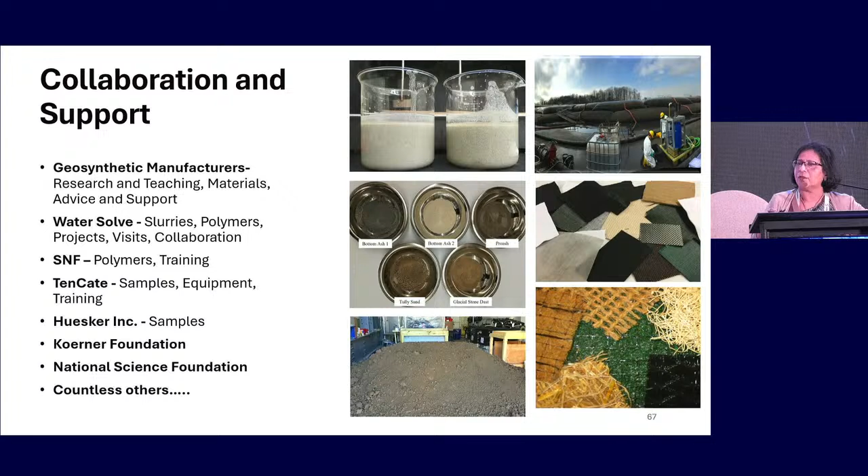I am very thankful for long-term collaboration with industry who have provided samples, slurries, and training. Some of the polymer manufacturers, like SNF, have for the last 30 years, without question, sent us polymer, come to the lab, trained us. TenCate and Huesker have provided testing equipment and samples, and of course the Koerner Foundation for funding several of my graduate students, and the National Science Foundation, which I've been lucky to receive funds from to do research in this area.

Now, no academic journey can be wonderful without great graduate and undergraduate students. So I can't thank them enough. It has been an exciting journey. And my last slide is about mentoring, helping, and collaboration.

I have to take you almost 30 years back, when I presented my first paper at an ASTM meeting. I really did not know about the different types of geotextiles, so in my presentation I misquoted a geotextile - it was non-woven, needle punch, I said something wrong. After my presentation, a couple of people came to me and said that I really don't know what geotextiles are, and that I had a lot of learning to do. I was very disappointed - I had just started working in this area.

But there was a gentleman named Bill Hawkins - I think some of you remember him. He came to me and said, 'Do you have some time? I'll be happy to sit down and explain to you what geotextile manufacturing is.' And for 40 minutes, he sat down and explained it to me. I've never forgotten that. He became a wonderful collaborator - we talked, we published together. That's what I call true mentoring and collaboration.